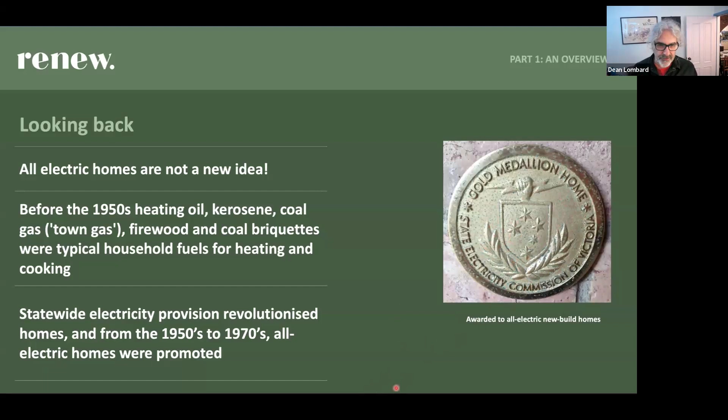So yeah, in the 1960s, really, is when what became known as natural gas really started to happen, and it's basically a byproduct of oil drilling, and that's why gas is so much more common in Victoria than in other states because there was so much oil drilling in Bass Strait in Victoria. But there's oil drilling in other places as well, and methane gas was just a byproduct of drilling for oil. And the idea was, oh, we could actually sell this gas instead of just venting it to the atmosphere or burning it.

We could put it in pipes, send it to cities, and use it as a household fuel. And it was even cheaper than electricity because it was basically a free fuel, they got it for free when they drilled for oil. And that's really how natural gas sort of happened. And it really happened in larger cities and urban areas because that's where it was most cost effective to pipe it to and to distribute it.

And look, in colder areas, it became more common because it was much more effective and efficient than the electric heating technologies of the time. So it was used especially for heating. And you see that in all the large towns and cities in Victoria and in larger cities in New South Wales and especially in colder areas like Canberra's got a lot of gas heating too.

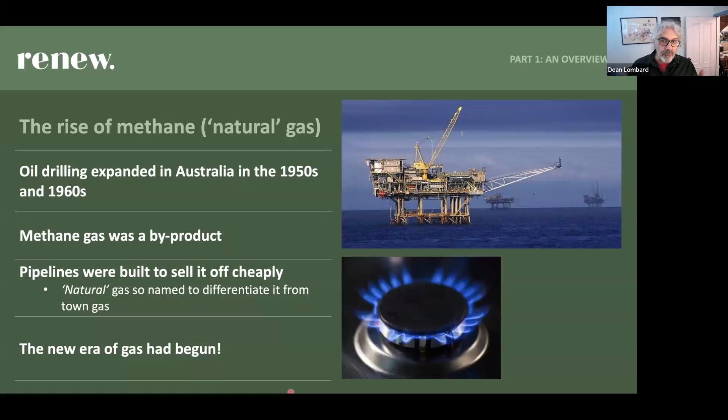And yeah, it's just methane, which is actually a terrible greenhouse gas. It's worse than CO2, carbon dioxide, but it was called natural gas to make it sound a bit nicer than methane. And one of the impacts of the success and popularity of gas, I think, was that even in areas where it was not practical or cost effective to pipe gas, bottled gas became common, in regional areas in particular, because people liked gas appliances so much.

And it's because the gas was cheaper and the technology for the electric appliances was pretty rudimentary. We all remember resistive or ceramic electric hot plates that take ages to heat up and then ages to sort of just to heat, and gas was so much more responsive, so people really valued it because of that.

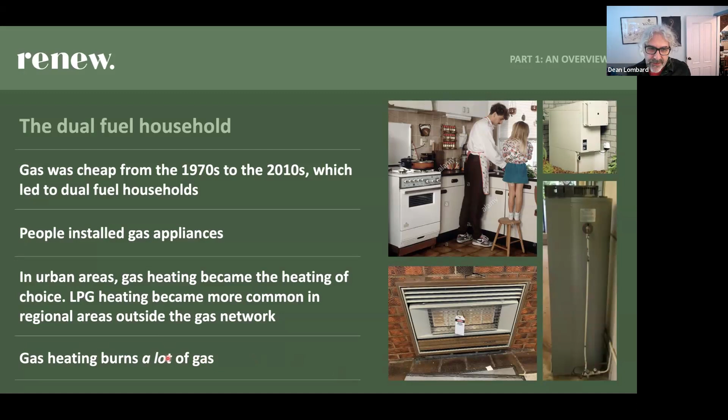And of course, especially heating, gas heating burns a huge lot of gas. I've got ducted gas heating in my house. I just got my quarterly gas bill that was $600 because of a lot of gas. And when gas was cheap, it didn't matter so much, but it's gotten a lot more expensive, which has made a big difference. And yeah, this is part of what's changing now. The oil wells are mostly drying up. The Bass Strait gas field in particular is expected to be completely exhausted in a few years.

Most gas production now is from coal seam gas or fracking, which is where they extract it out of the ground. It's a much more involved process. It's a dirtier process. It pollutes a lot more. And it's more expensive. And also a new gas export industry has been developed in Australia over the last sort of 7 or 8 years.

So we now sell a heap of gas to other countries, mainly Southeast Asia. I think Japan and China and Korea are big customers for our gas. And that has exposed our gas production to global prices, which are much higher than what they were selling at local prices before they had access to the international markets. And these two factors have rapidly increased the price of gas. It's heaps more expensive than it has been for most of the time we've had gas.

And that's one of the things behind our increase in electricity prices, because gas is used to generate electricity as well. And it's why my gas bill and some of your gas bills maybe are much higher than we're used to. And that's just the economic side of it.

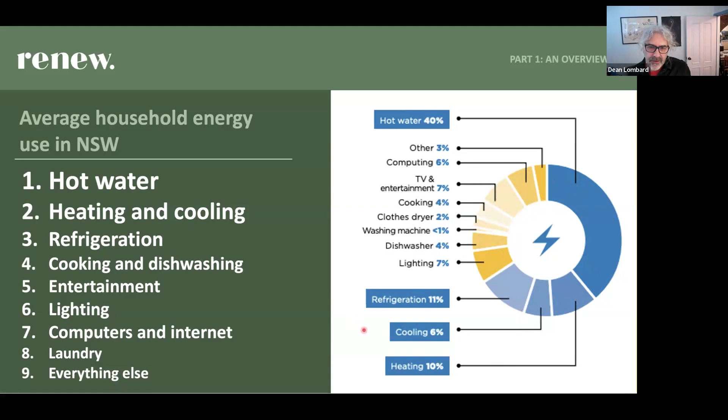And all this other stuff is only electricity that we use mostly. I think some people have gas clothes dryers, but they're not really that common. So that's why we talk about heating and hot water mostly when we talk about electrifying. And we also talk about cooking, because they're the three main appliances.

So the first thing that people always ask is about the cost. Especially because those of us who grew up in areas where gas was common as a household fuel always believed it's cheaper. And it absolutely used to be cheaper than electric, especially for heating and hot water. That's really because of older electrical technology that was not that efficient, combined with very cheap prices for gas.

The old resistive hot water systems, the old resistive cooktops and resistive heaters, like a radiator sort of thing, are a little bit more efficient than gas heaters in terms of energy in converted to heat energy out. But because gas was so much cheaper, that made gas a lot cheaper.

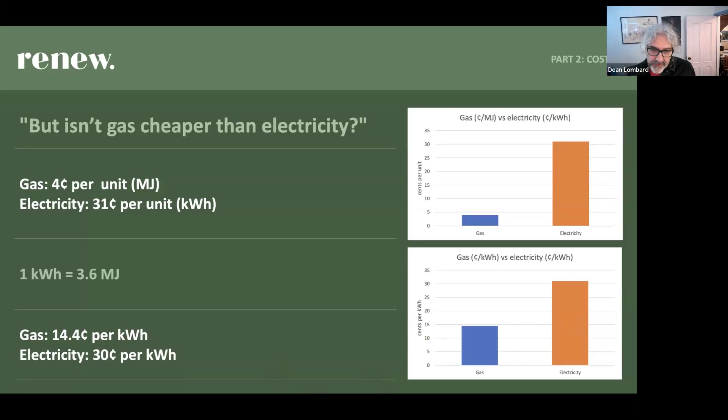And if you do that, gas is still cheaper than electricity. It's still about half the cost of electricity, 14.4 cents compared to 31. This chart shows 31. So gas is still cheaper than electricity per unit. So how could it be that it's cheaper to use all electric? Well, it's because the appliances are different. They have different levels of efficiency.

Gas heaters, 80% efficient on a good day. If you've got an older heater, it's less. If you've got a ducted heater, it can be quite a bit less because over time the ducts wear out. There's probably not that much ducted heating up where you guys live, but further down south there's a lot in Canberra, for example. Hot water, similarly, an instant hot water system is about 90% efficient for gas. But the equivalent electric appliances that use heat pump technology are many times more efficient.

An electric heat pump heater, which is a reverse cycle air conditioner on a heat setting, a bad one is 450% efficient. It can be up to 600% efficient. It puts out 6 times more heat energy than the electrical energy that goes into it. If that sounds like it breaks the laws of thermodynamics, it doesn't, and I'll explain why in a minute. Similarly for hot water, even though gas instant hot water systems are very efficient compared to nearly every other type, the electric heat pump is still far more efficient.

So when you look at cost per heat out of the appliance rather than per energy into the appliance, that's when it works out that electricity is much cheaper. Even though gas is 14 cents a kilowatt hour and electricity is 30 cents, at 80% efficient it's 18 cents cost to get the energy output. Whereas for a reverse cycle air conditioner, even at 450% efficient, one of the less efficient ones, it's only costing you 6 cents to get that heat output because you're putting in far less than a kilowatt hour to get that result.

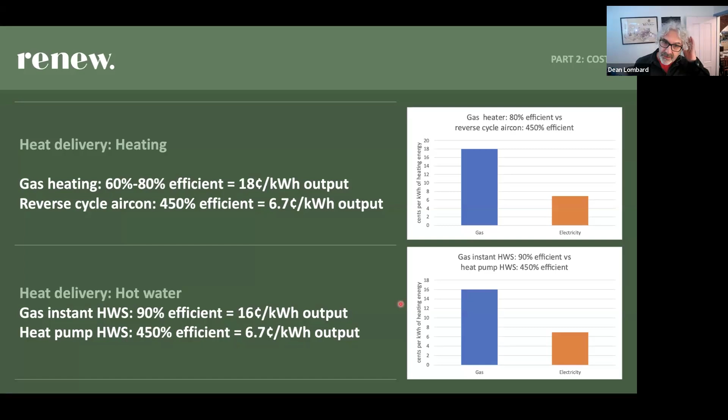That's really the heart of it. And this is why gas used to be really cheap, because the electric appliances just weren't as efficient. And since the 1970s and 80s, the technology has improved out of sight. And now the electric ones are so much more efficient that they just blow the gas ones out of the water in terms of fuel costs per heat energy out.

And heat energy out is what we care about when we're looking at a heater or a stove or a hot water system. We don't want the electricity just for the sake of it, or the gas. We want the heat that it gives us.

For emissions, people will say quite rightly, and the gas industry also likes to talk about this, gas has lower emissions than electricity. We make electricity with coal power stations. And look, it is probably true. I mean, it's sort of misleading to think about electricity emissions as the coal power stations, because as you know, there's lots of different types of power stations that make up the system, including solar and wind and hydro.

So the correct way to understand the emissions of the fuel is to look at what's called the emissions intensity factor of the grid. So the emissions intensity factor of the New South Wales grid looks at how much of the energy demand is taken by all the different types of power stations, and looks at the emissions of all those different types of power stations in that proportion.

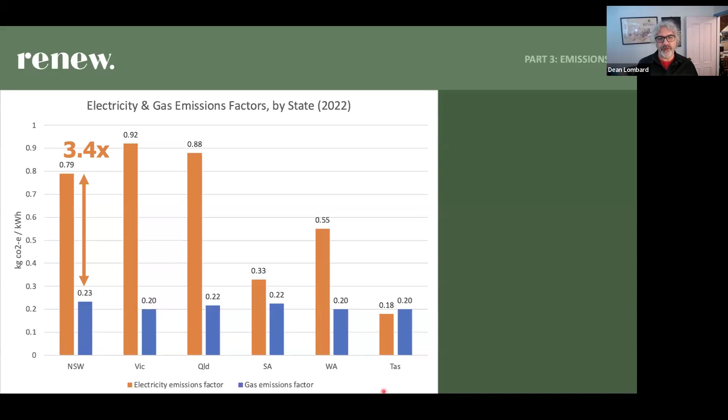But it's still true that despite that, there are less emissions in the gas system than in the electricity system by a considerable factor. It's like 3.4 times. This is using the conservative estimate of the gas industry, giving them the benefit of the doubt. But you see, the thing that makes the cost work in favor of electricity also works for the emissions, because efficient electric appliances use far less energy to get the same output,

because they're much more efficient. So, a gas heater on a good day is 80% efficient. Reverse cycle aircon, the cheap, not so efficient one, is 450% efficient. That's 5.6 times more efficient than the gas heater. That is much more than the 3.4 times more emissions that electricity generates.

So when you factor in that you use far less electricity to get the same heat as you would for the gas, you end up with less emissions, because you're not using this much, you're using this much. Same for the hot water. But that's only one part of it.

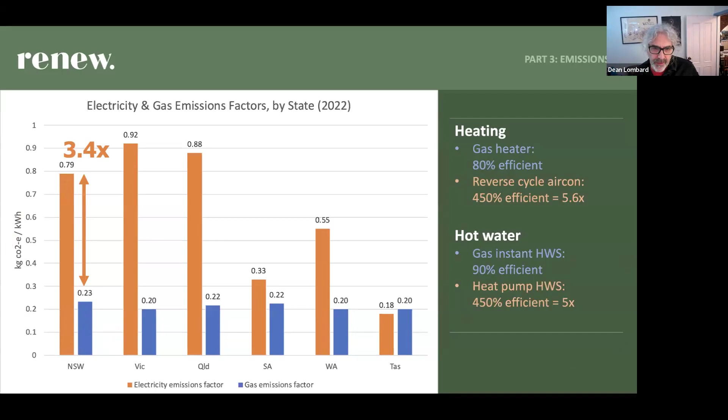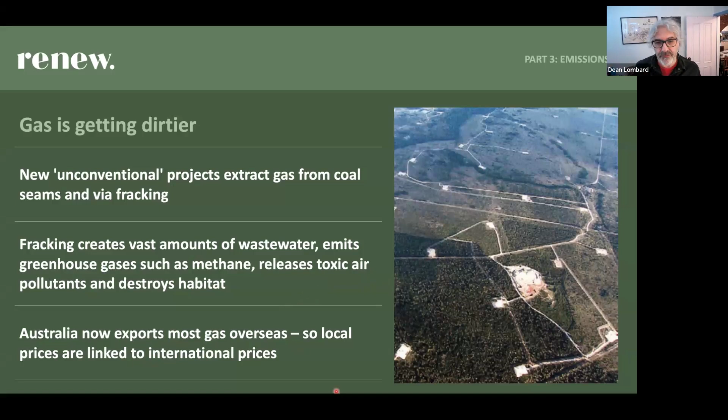The other part of it is, as I sort of mentioned, gas is getting dirtier because of what they call unconventional gas, fracking and coal seams. It also creates other pollutants like wastewater, and as I mentioned, prices. So gas is actually getting dirtier and more expensive. So the future grid will have dirtier gas than the current grid does, and electricity is getting cleaner.

Like already, and people don't realize this, New South Wales currently has more than 30% renewable energy in the electricity grid. I checked the figures yesterday. In the last 12 months, 31.6% of all the electricity used in New South Wales was renewable. And it's changing fast. Over the last 5 years, the share of wind and solar has more than tripled, and then it's going to more than double again by 2030.

And these figures are from the most recent greenhouse emissions projections. It's currently, like I said, 31.6%. By 2025, the expectation is it'll be 44% renewable.

In the New South Wales grid, and that's based on projects that are currently underway as well as future ones. By 2030, 82%. By 2035, it's fully expected New South Wales will be 95% renewable. That change will make a huge impact on the expected emissions of the New South Wales grid. And the greenhouse emissions projections for 2030, which was published in 2022, estimate that by 2030, New South Wales will only emit about 15% as many emissions as they did last year.

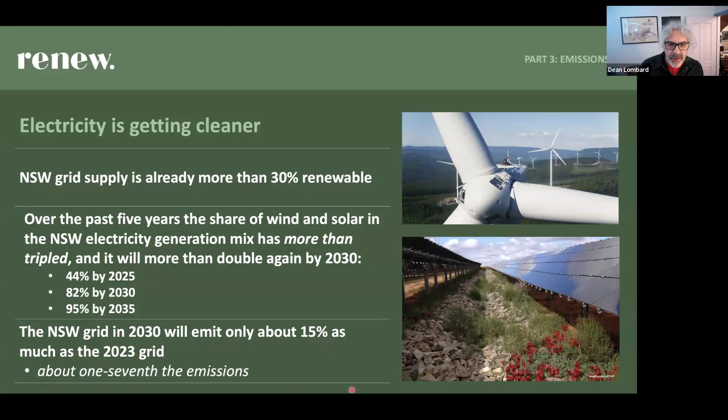That's 1/7 the amount of emissions. That's a huge change. And it's similar for other states. And so if you go back to this chart, this is now 2023. This is the latest data available, right? As we said, 3.4 times more emissions in New South Wales. But by 2030, the emissions of the electricity grid in New South Wales goes from here down to there, lower than the gas grid. And that's not even counting the additional efficiency of electrical appliances, the heat pumps, that make the actual emissions of running appliances even less.

And so it's the same everywhere. Victoria, Queensland, WA are the only places where electricity emissions will still be higher than gas, but they'll be much closer. South Australia and Tasmania got down to almost nothing. So it's a huge change. And when you're thinking about changing an appliance, you buy that appliance today. If you get a new heater or a new hot water system, you're buying it today. Its economic life is 10 or 15 years. You'll probably have it for 20 years. Within 5, 6, 7 years, the grid will be cleaner than the gas grid.

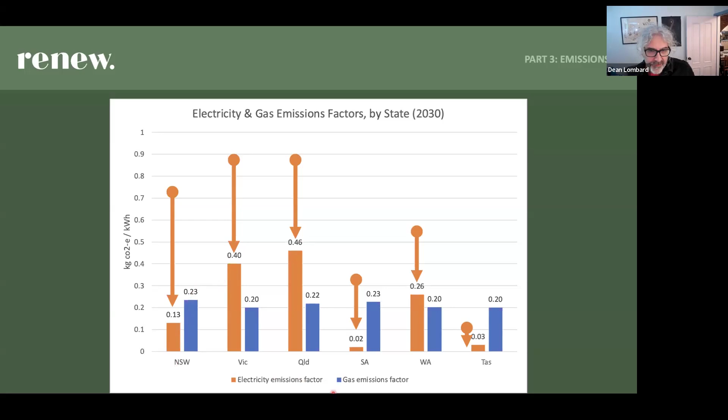So even though right now the electricity grid is more emissions intensive than the gas, early on in the life of the appliance, that will flip. And that, as I said, is not even considering the effect of the extra efficiency of the appliance. So I think it's really useful to understand that we should always look at appliances over their life and not just snapshot where they are now.

And look, as part of that fuel choice research Renew did a few years ago, we also looked at the emissions impact right across Australia, and pretty much everywhere except one or two places where there's virtually no heating, everywhere else the all-electric home was lower emission than the dual fuel home all around Australia. So let's look at the appliances.

And there's this evolution of appliances where we talked about the glory days of the all-electric home back in the 1950s and 60s. These old clunkers were the groovy, newfangled appliances of the day. They replaced wood stoves and wood heaters, kerosene heaters, etc. By the 90s, we're talking about gas. And again, it depends on where you live, whether it's LPG, whether you've got reticulated pipe gas. But it's fairly common to have some sort of gas heating. This picture is really probably more Victorian. Where you are, you're probably more likely to have small portable gas heaters, if at all, I'm guessing. Gas hot water systems, gas cooktops.

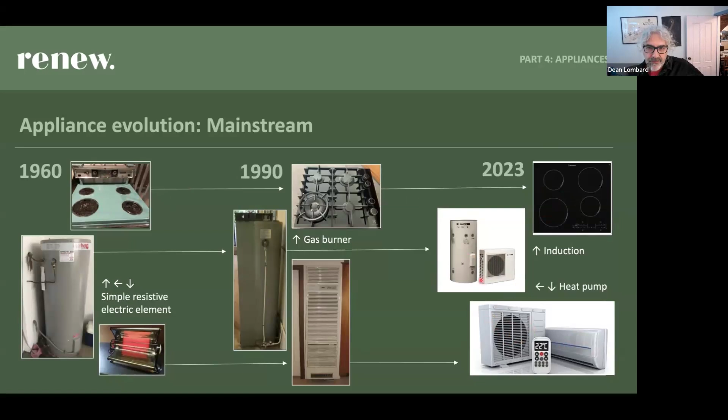And by now, 2023, induction stoves, which is a very different technology to these resistive or ceramic stoves. They're like gas in that you can turn them up and down and they respond instantly. Heat pump, like your reverse cycle air conditioner, also with hot water. That's a heat pump. That's a little magic thing that creates more heat than the energy that goes into it to run it. So these are the appliances of the all-electric home, and I'm going to go into them in a bit of detail.

But first I'm going to give a little, hopefully not too techie, dive into how the heat pump works, and that's only because people often find it hard to believe that heat pumps put out more heat energy than the electrical energy that runs them, because many of us are familiar with the law of conservation of energy. And the trick really is that the electrical energy that runs the heat pump is not turned into heat. So you're not using the same energy.

A heat pump is like a fridge in reverse. And in fact, when you're running your air conditioner as a cooler, it's just like running a fridge. It's just blowing cold air at you instead of making your food cold. But when you're using it in heating mode, or in a hot water system, it's like a fridge in reverse. The electricity that powers the appliance is used to run a pump and a fan.

The fan sucks in air. The pump pumps refrigerant around a system of pipes and concentrates it. Basically, the compression of the refrigerant sucks heat out of the air into the refrigerant, and then it expands somewhere else to produce the heat that comes out. So the heat pump is moving heat from one place to another. It's not creating heat out of nothing. That's why the electricity that runs it is not the heat that comes out of it, and that's why you can get more heat out of it than electricity that goes into it.

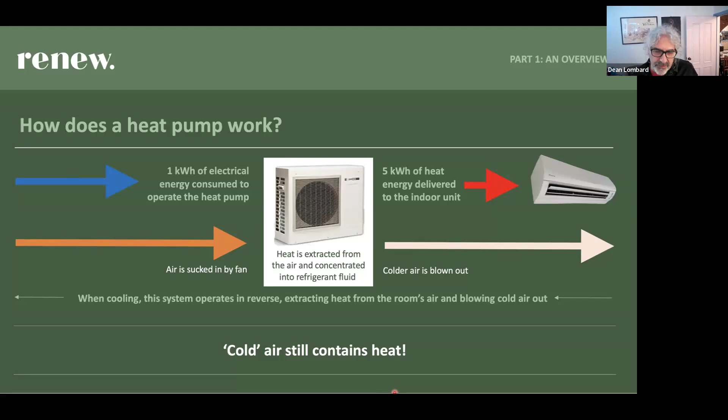A heat pump definitely wouldn't work at -273 degrees. It probably wouldn't work at -100. But they're all over the place in Scandinavia, and they have temperatures well below zero, and their heat pumps work fine. Some of the cheaper, crappier heat pumps might not work as well in really cold weather. One of the specs on the sheets, if you buy one, talks about its efficiency in different ambient temperatures. So it's still a consideration, but there's always heat in the air, and the heat pump takes the heat out and puts it in the house or in the water cylinder. That's how it works.

That's what enables it to be so efficient, that the electricity is not actually producing the heat. That's different to those old-fashioned stoves where they zoom the electricity around the coil and heat it up by sort of friction. That's also how those radiant heaters work. It's resistance in electricity flow. It turns electrical energy into heat energy. That's completely different with this heat pump technology.

So look, I'm going on a bit, so I better speed up a bit.

So the appliances are different, and people often ask, is it going to be okay? I'm not sure about changing. Heat pump hot waters, I'm going to start with them because they're probably the least common and the ones that people know least about. A heat pump hot water system is a storage hot water system. Storage in the sense that there's a tank, it's filled with water, and then heat is applied to the water to make it hot water.

Same as your old-fashioned in-the-ceiling, heat-up-overnight electric hot water systems. Same as your big cylinder electric hot water systems or gas storage hot water systems. Different to the modern gas instantaneous hot water systems that heat the water as you use it. So that's the main difference you might experience if you're used to an instantaneous. But the instantaneous technology has only relatively recently become very common, probably the last 10 or 20 years. Before then, storage was pretty much the most common.

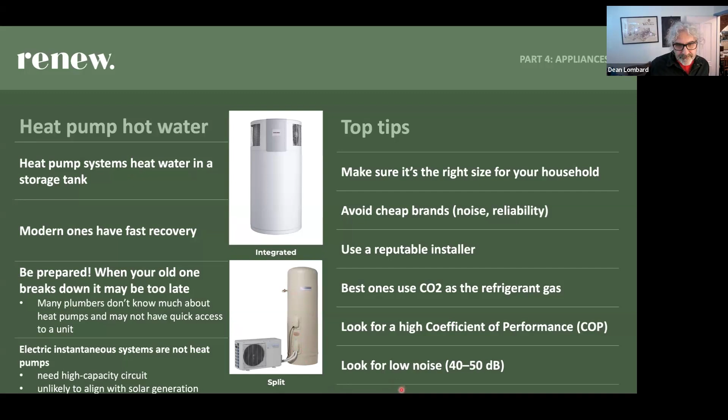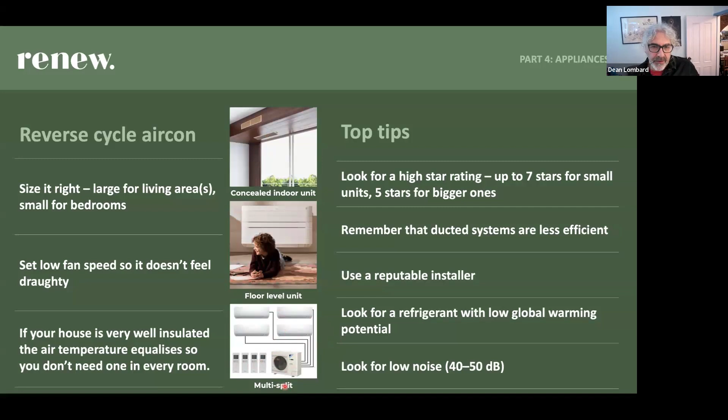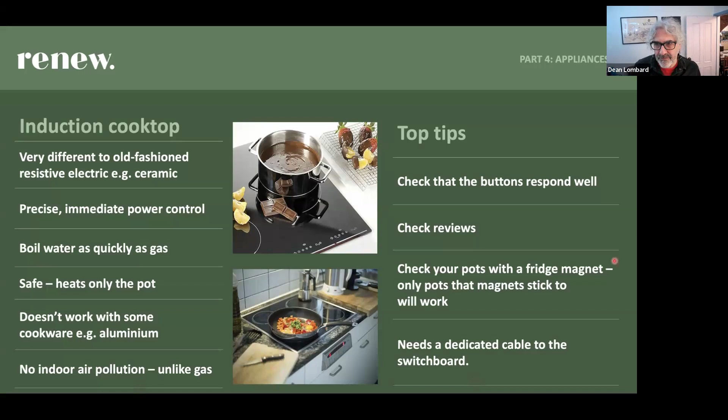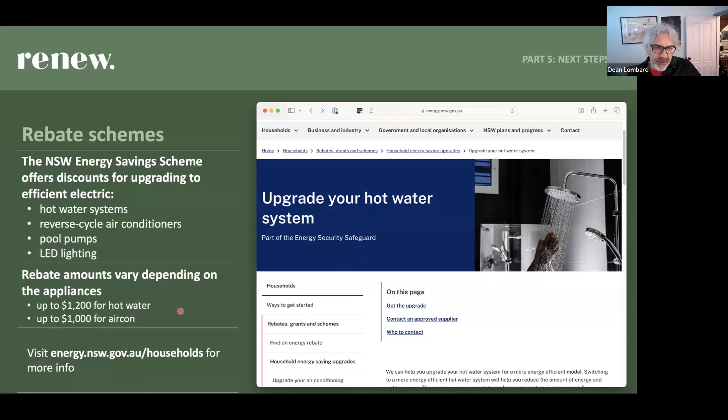So that's about easing the financial burden. And when you think about the finance, also do remember that all this modeling has been done by Renew and others that show that it's actually cheaper to make this change in the long run. Even if the cost of doing it is a bit upfront, you save all this money by reduced running costs. So it is worth it financially.

The rebate is especially helpful if you've got it. For many of us, the initial upfront cost can be a bit of a stretch, even if the benefit is there for us. Making a change, people often ask, well, should I do them all at once? Should I just rip out all my appliances and change them over? Or what should I do? Which one should I do first? And really, whatever you like is the answer.

But I would normally go, wait till your appliances wear out. You've already got your heater or your hot water system, it's working fine. If it fails, or if it's getting old enough that you think it's going to fail, I should replace it. That's a good time to change, because you're going to have to be spending the money anyway. So why not spend it on the electric one instead of replacing it with the gas one? And build in that saving for your future, because once you replace an appliance, it's there for 20 years longer.

So that's a really good time to do it, with the caveat that if you've only got one gas appliance, it's always economically worth it to just rip it out and replace it with an efficient electric one, even if it doesn't need replacing. But some of us are like, let's use the embodied emissions and production of the appliance to the fullest capacity. Let's keep it until it needs replacing. Of course, that's also environmentally sensitive to do it that way. So it depends on what works for you.

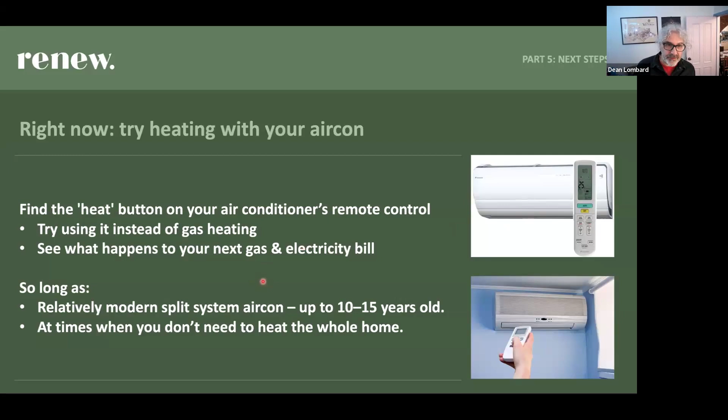And I've spoken to a few people who did this. They just used their existing aircon that wasn't even a modern one or even super efficient, and found they saved hundreds of dollars by using that instead of their gas heater. Because that efficiency really drives the savings. So that's a good way to try it out if you're a bit unsure.

If you're building a new home, we look at this too. Absolutely don't ever install gas appliances. Make them all electric. It's the cheapest way to do it because you're paying for everything up front. You're paying a gas connection fee. You're paying for brand new gas appliances if you're getting gas. May as well just not get that gas connection, get new electric appliances and design the house to work with the efficient electric appliances, and you'll be ahead from day one.

And if you are doing a major reno, because I guess going back to when you do it, if you're doing a major reno, that's also a good time to do the change because you might be pulling out lots of stuff. And yeah, also if you're doing a major reno or buying a new home, really think about the energy efficiency, the thermal performance of your home.

The current standard for new homes is 7 stars. It's sort of just come in. I think it's being implemented as we speak. Going up to 8 or 8.5 stars, according to research that Renew did a few years ago, is very cost effective in terms of the extra that you spend to make the house more thermally efficient than the legal requirement. It will be worth it within 5 or so years, 5 to 7 years, in terms of reduced energy expenditure, energy usage. So it's very worth it to do that.

If you've got an older home, it's very hard to get it even up to 7 stars, but it's not that hard to get it up to 4 or 5 in many cases. And given that a lot of older homes, like built before 2000, are often 2 or 3 stars, you can make a lot of gains, and the marginal benefit of getting a really poorly performing old home that's maybe 1 or 2 stars up to 4 or 5, that's a huge change, a massive reduction in your heating expenditure.

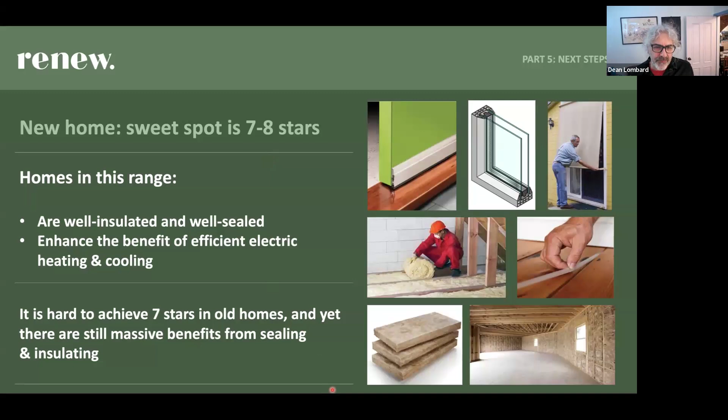As I said at the start, solar panels go great with an electric home, especially if you can heat up your water in the middle of the day. Solar has great environmental benefits in many ways. And it's really a no-brainer to be all electric when you have solar, because when you've got solar, the most value is by using electricity that you generate. And the more non-electric appliances you have, if you've got gas or wood, you simply can't use your solar energy with those appliances, but you can if you've got electric appliances, so you get better benefit, especially nowadays as feed-in tariffs are much lower.

Close it if you have a gas account. If you've got a reticulated gas account, you need to speak to your retailer and your network provider. There might be a fee. You might have to sort of push a bit because they hate people disconnecting. You don't have to have the meter removed. There's an extra fee that can be quite expensive, up to like $1,000 sometimes to get the meter removed. A lot of people will just leave them there. It's considered best practice to remove the meter and the pipe to the street for safety reasons.

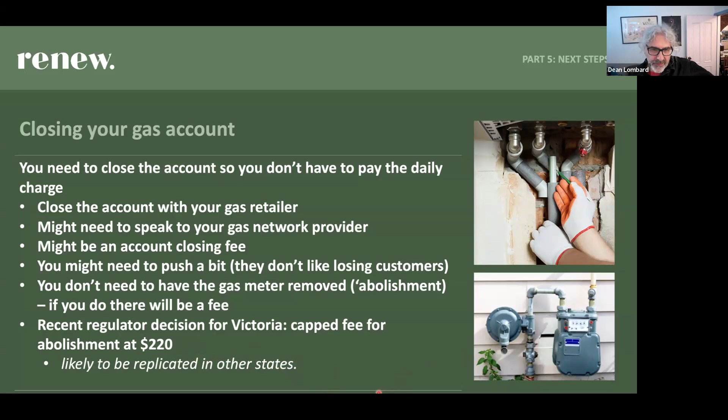If you've got bottled gas, it's a lot simpler because you can sort of close your account and they can remove the gas bottles. And I'm not quite sure on all the ins and outs of removing the infrastructure, but those would be good questions to ask.

Yeah, look, I'll skip over this because we're running a bit over time, but you can go all electric by getting off petrol as well. After gas, petrol is the next biggest, it's probably bigger than gas actually. That's the other big fossil fuel that we use.

So, different issues for electric vehicles in built-up areas versus regional areas where you might have much longer distances, but many people who live in regional areas have found that they go quite well, and most people find they mostly charge them at home. So definitely have a look at some of the links that Doug's put in the chat about electric vehicles.

And keep in mind that the EV rebate finished on 31 December; they used to get a $3,000 discount for buying an EV. The government found that that was just pushing the price up by $3,000, so they ended it. You still have some fringe benefits tax benefits if you have a novated lease. I don't even understand what that is, but if you know what it is, you know what it is. That's a benefit.

But there's also a program in New South Wales to develop EV infrastructure all around the place. So, EVs are definitely the future. By the mid 2030s, they'll be the most common sort of car around by all accounts. So something to think about as well.

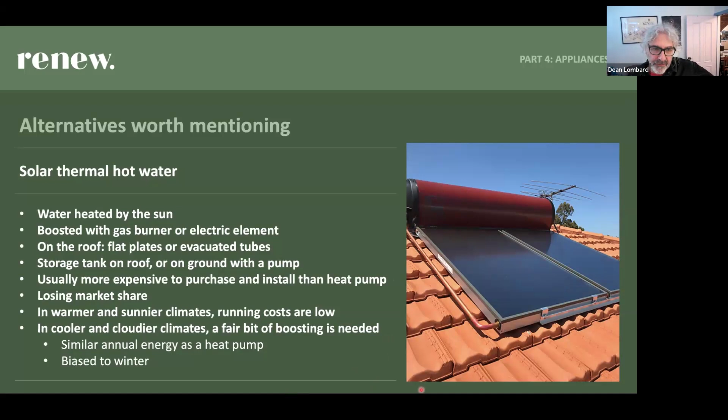Evaporative cooling, I don't know why that's here, but I guess they're common. Thing is, the more humid it is, the less well they work, and everything's becoming more humid. They don't use much electricity. They use a lot of water.

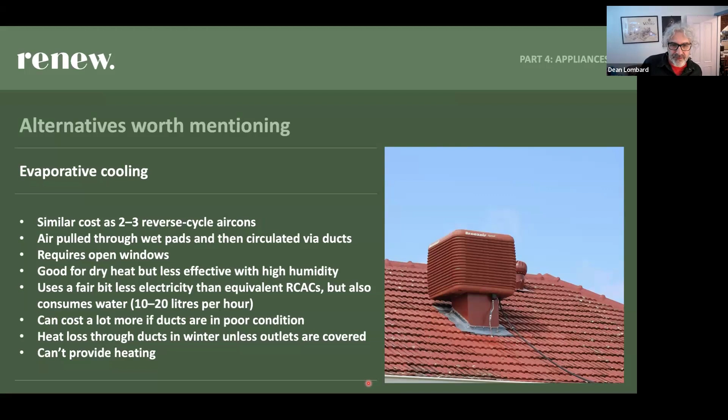Reverse cycle air conditioners are generally more cost effective when you consider all those costs. And they cool more effectively when it's hotter and when it's humid. Evaporative coolers can't provide heat, and if you buy a reverse cycle air conditioner, it cools and it heats. You get double value. There's a few special cases: with very low hot water consumption, a heat pump might not be worth it.

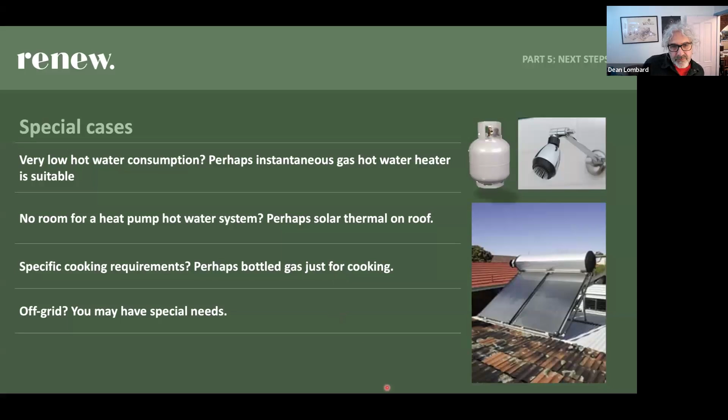If you've got special cooking requirements, you might need gas for some things. People sometimes use a barbecue or a camp cooker or rig up bottled gas just for cooking. If you're off grid, you might need to consider things differently because you might need to limit how much electricity you use.

People often ask what happens if there's an outage in an electric home. Well, there's no electricity. Thing is, most modern gas appliances also use electricity, so they also can't be used without electricity. A cooker is often the exception, a stovetop, but like I said, if you've got a barbecue or a little camp cooker, that's a good option.

And hot water, yeah, that's a pain. Gas instantaneous hot water doesn't work without electricity. And if you've got a tank full of hot water, it's going to last a few days anyway; it takes a while before the water cools down. Outages are always inconvenient. If you're in an area that's prone to outages, then backup power options are worth considering. And even some things that work with a smaller bottle of LPG could be useful for you if that's a thing that affects where you live.

That's pretty much it, though. Two more things I'm going to do. One is this list of useful resources, which Doug is going to put in the chat for us. I already mentioned the New South Wales Energy Savings Scheme with the rebates. They've got this good climate and energy action website with heaps of information about energy efficiency and other stuff. You can get home energy assessments.

Look at homescorecard.gov.au. Sustainability Victoria, and I think it's because all electric homes is a big thing in Victoria at the moment, has great information at that link on everything you need to know about going all electric. The Getting Off Gas Toolkit by Renew is also a really good one. This is a fairly new thing that Renew's done, and it covers everything I talked about, but in much more detail.